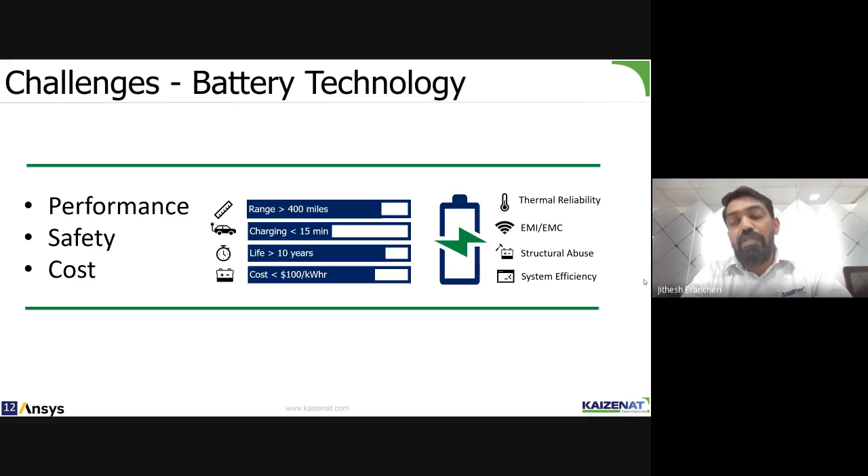At the end of the day, we need efficiency in the overall system, not just the battery. The whole system should work efficiently, while complying with all regulations, including structural abuse and thermal reliability.

How does ANSYS help in these scenarios? ANSYS provides a complete workflow for everyone working on EV vehicles. It basically gives a multi-scale, multi-domain, and multi-physics workflow right from the cell to the complete system.

At the cell level, the performance of the electrode and cells can be predicted. Then moving to the modules and thermal management, what could be the thermal impact, what temperature is generated, then EMI, EMC compliance, and structurally how the battery is going to be reliable, how structural reliability studies affect various load cases.

It could be an impact, penetration, or other load cases. And then the battery management system, another very important part to efficiently use the batteries. We can simulate and study those things, and then the system integration into it.

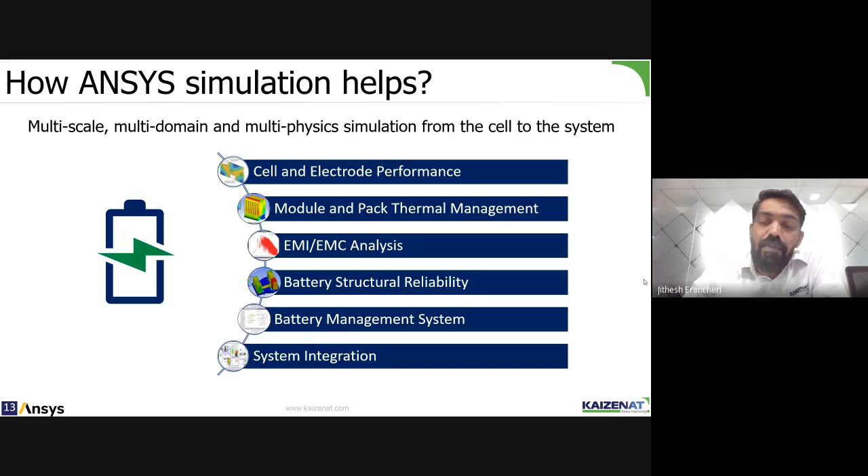That's another aspect of it, basically complying to the AUTOSAR rules and regulations. Let's go into detail, right from the cell and electrode performance.

Some of the engineering challenges we've seen are the thermal sensitivity of this electrochemistry, the complex structures of the electrodes, the porous electrodes, and the degradation of performance as it keeps aging. ANSYS offers a solution with a lithium battery template where users can directly key in those data and then simulate and study the sensitivity of various parameters.

It could be the materials, the particle density, or the electrode thickness and so on. You can also study different electrochemistries, and the impact of temperature and the C-rating of those cells, and the state of charge versus the VOC curve can be generated without any physical test. These are some of the outputs one can generate when looking at cell performance.

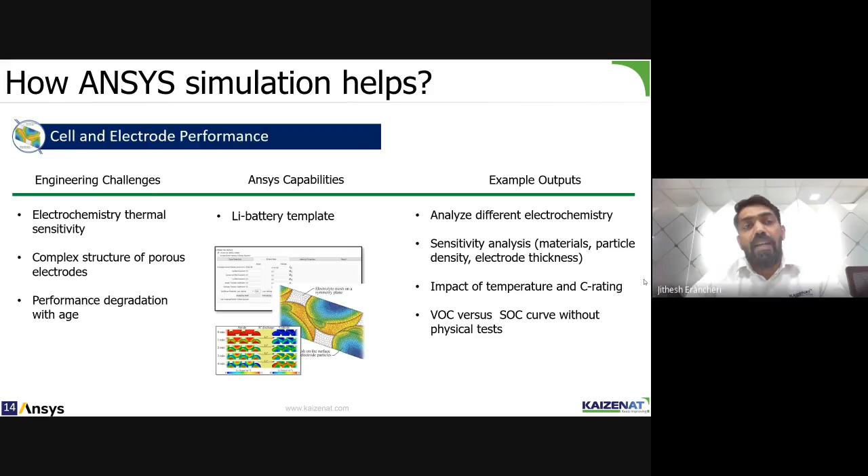Now let's say you wanted to study a battery module and pack for thermal management - what temperature would be generated and how it would be affected. That's where we can study using our conjugate heat transfer solutions, where we study the sensitivity of those temperatures, the cell current and voltage, and how much it varies from each and every cell.

We can also study battery cooling systems, like what could be the right approach to cool this particular battery - it could be liquid cooling or air cooling. And then we can always do different predictions, virtually testing on different drive cycles.

The fundamental thing is we can study thermal runaway and try to understand all the different kinds of abuse responses that need to be carried out, which is pretty important in terms of predicting failures.

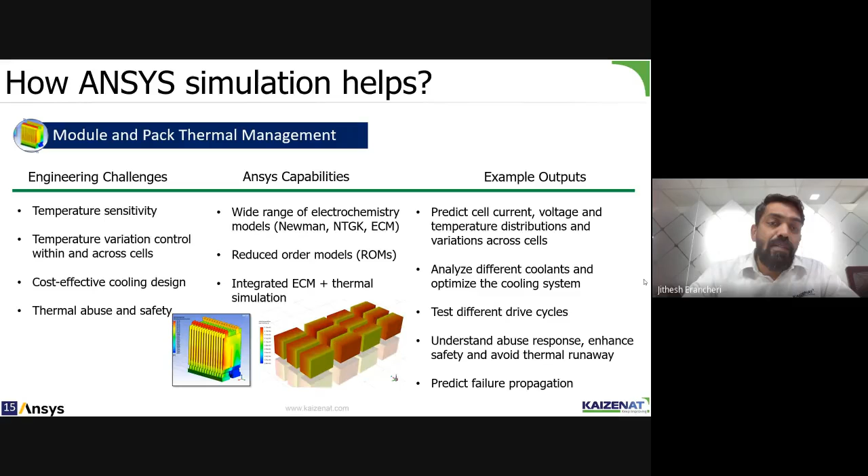ANSYS offers reduced order models, which can run at a fraction of normal simulations and produce thousands of designs in seconds. This is one of the new trends in the simulation industry, where we build reduced order models, generate new designs, do sensitivity analysis, and arrive at the design variables that can cause issues like failures, or the more sensitive variables that can affect performance.

EMI-EMC analysis is another standard process one has to do from an electromagnetic perspective, because electromagnetics always has interference as part and parcel of it. So we need to study the electromagnetic interference and the compliance for that, and we can detect that using ANSYS solutions for electromagnetics.

And then you can design or redesign your circuits, or redesign your BMS, with placements of filters or something like that.

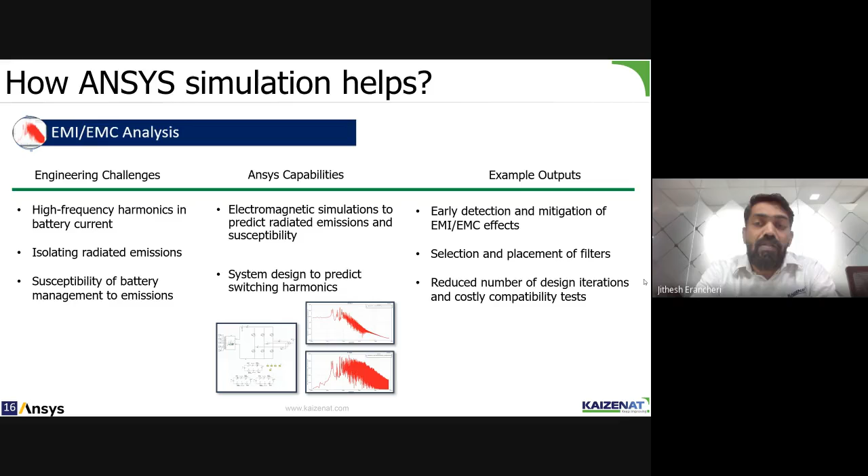These are some of the capabilities from the EMI-EMC perspective. Then comes battery structural reliability, where ANSYS mechanical solutions, which includes LS-DYNA, can now study various challenges and virtual testing on various scenarios - right from vibrations to impact, and penetrations of nails and so on, quite a lot. The beauty here is it's all coupled - all the physics are coupled.

So you have a structural analysis, but it's not purely structural analysis - you will also have a thermal analysis with electromagnetic solvers getting into that.

ANSYS Mechanical offers thermomechanical analysis for all those batteries, and you can also study the life in terms of random vibrations and fatigue, ensuring that all the abuses are not catastrophic - it should not create a lot of temperature, and you can study the state of charge when it is impacted with a bar, or some impactors, or nail penetrations and so on.

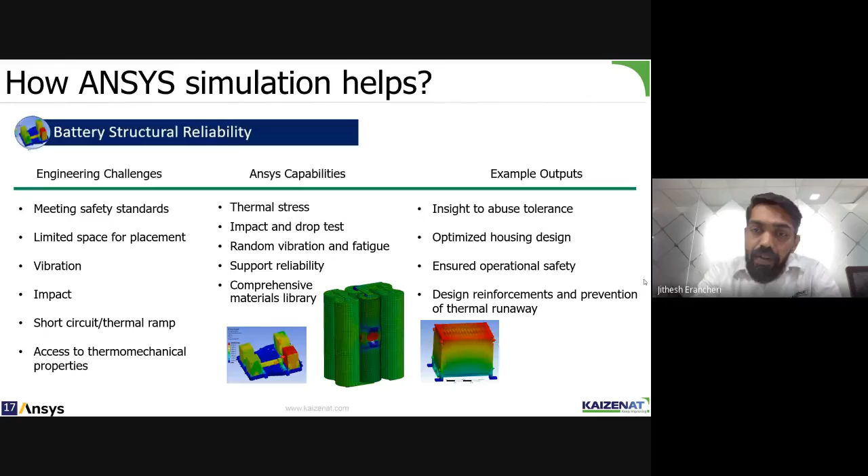Battery management system - this is one of the very important aspects of EV, where we need not only efficient usage of the cells, but also some sort of functional safety analysis. There are safety standards like ISO 26262, which is a compliance standard for BMS, and it has to be certified or comply with this standard in terms of functional safety.

ANSYS has solutions like Medini, which can do this kind of functional safety analysis, and generate certified code for that. So BMS is not only for optimizing efficient usage of your cells, but the solutions can also be used to predict whether your BMS is complying to the standards.

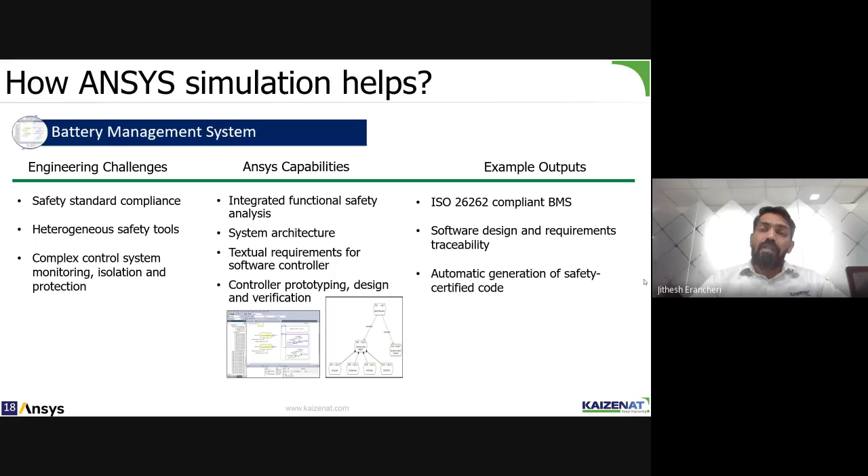System integrations is the final part of it. That means we can integrate everything together, working the entire system. I would say it can be called a digital twin, and the digital twin can be used to have a complete closed loop system where right from the cell to the system can be simulated, with the deformation in the structure. So this is a complete solution, a complete connection of all those things I was talking about all this while.

This basically connects right from the cell to a three-dimensional model, where you would have done some finite element model, to a control system and to the battery management system, and then back everything in a closed loop. This actually gives you, I would say, what can certainly be called a digital twin, and you ensure that your virtual prototype is satisfying its objectives and is pretty much well within the limits and regulations.

And you want to improve it, optimize it, you can do that, and then go for physical prototyping. So these kinds of simulations certainly help any designers who are into EV or electric vehicle companies, to upfront design a virtual prototype. It can be called a digital twin, and this can be validated anytime before you go into a physical prototype.

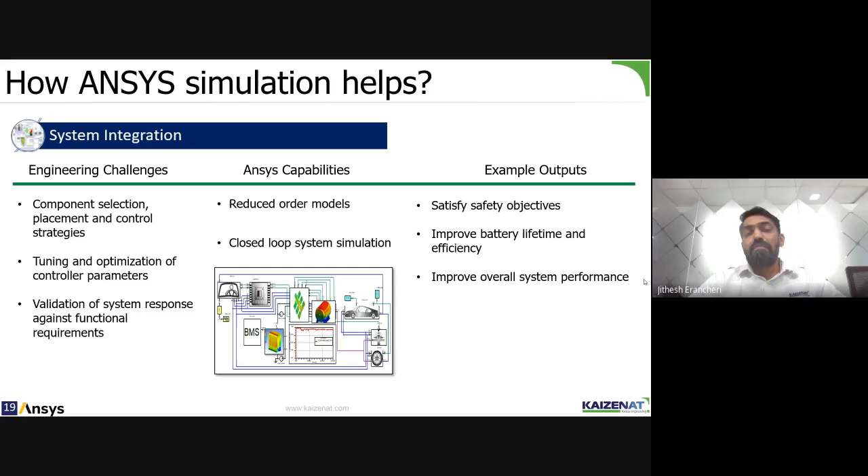And then comes the integration, the introduction to LSDYNA, and this is our second topic. In this, I'm just going to give a brief about LSDYNA software.

LSDYNA was earlier developed at Livermore Software Technology Corporation, Livermore, in the United States, and I think two years back, ANSYS acquired that company. It has been a front runner, I would say the global leader, in terms of crash analysis.

It started as a software code developed for impact, basically for bomb drop analysis, by a nuclear scientist called Dr. John Hallquist at the Livermore National Labs, United States. Somehow it picked up in the automotive industry, and then people in the aerospace industry use it for bird strike simulations, the locomotive industry uses it for rail coach crash simulations.

Appliance industries use it for drop analysis, and many other analyses for that matter. Since it was born in defense, it's been very widely used for blast, bullet penetrations, ballistic impacts, and internal ballistics, and so on. Construction equipment industries use it for rollover protection systems.

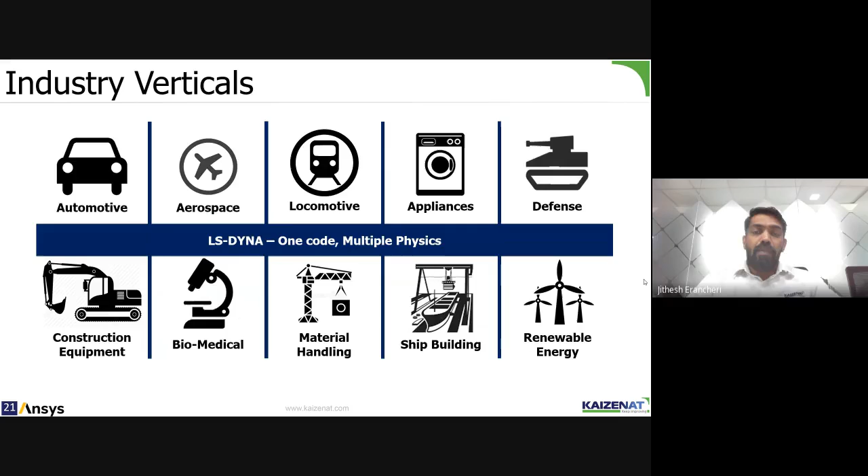It's called the LST product. After ANSYS acquisition, it is called LST. The LST products include LS-PrePost. It is a preprocessor where we import the CAD model and then do the mesh generation, apply the loads and boundary conditions, and then run it in the LSDYNA solver, and take the results.

And then post-process it. LST products also include LS-OPT and LS-TaSC. These are the two, I would say, optimizers which come along with LSDYNA. LS-OPT is used for various sorts of optimizations, in terms of thickness optimizations, material parameter optimizations. It can even be used with your FE models for various optimizers, in terms of whatever design variables you have.

Dummies, barriers, and tires - these are the three FE models which come along with the LST product, LSDYNA - basically calibrated dummy models which can be used for crash analysis.

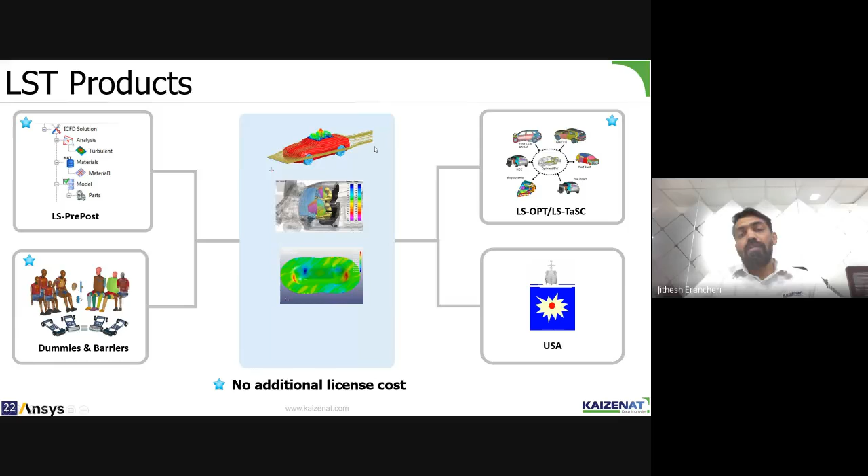As you can see on the screen, the center one is a CFD simulation, the second one is an airbag, and the third is a metal forming simulation. So everything is in one single code - though it is multiple physics, everything can be done in one single code. That's one of the reasons why LSDYNA is very popular, because it's explicit to implicit at any given point of time.

For the form part, you do a forming analysis in explicit, and then at the end of the simulation, if you wanted to do a spring back study, that can be done in implicit without manual intervention.

Heat transfer is another analysis where we have a thermal solver that works with our structural solver as well, so we can have a coupled heat transfer analysis or even a completely thermal analysis.

ALE and mesh-free methods are all trademark uses of LS-DYNA, used for fuel tank sloshing or even bird strike impact and so on.

Acoustics and frequency response are also capabilities of LS-DYNA, where we can see exterior noise, interior noise, and so on, quite a lot.

Discrete element models are ones where we can study the interaction between particles. For example, you wanted to study soil-structure interaction, or when a vehicle goes over sand or soil, how it's going to happen. This kind of study can be done with discrete elements.

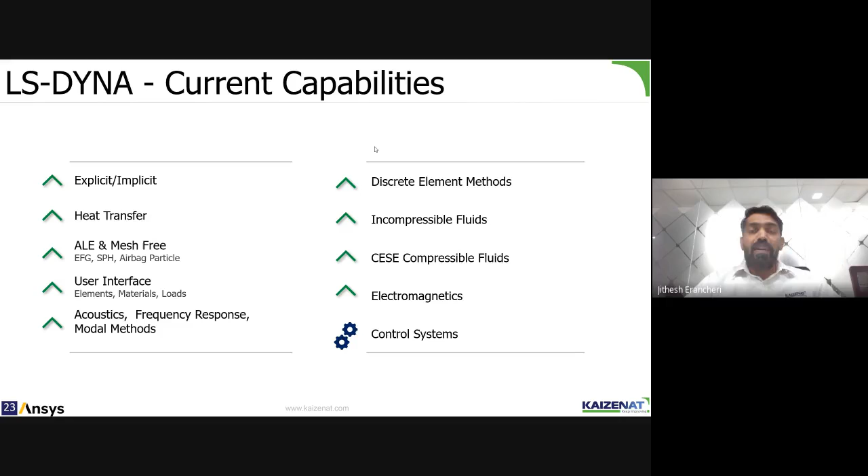Compressible flow solvers are available, and incompressible flow solvers are also available, along with electromagnetics, which I'm going to talk about in detail in the coming slides. So that's what it is - one single code with multiple physics.

Let's get on to the vehicle dynamics part. Vehicle dynamics is also very important in terms of the vehicle development program. As you know, LS-DYNA comes from the ANSYS family.

I thought I should take some time to introduce you to a product called ANSYS Motion, which is very effective and can be used extensively for all kinds of rigid body analysis. As you can see on the screen, various kinematic simulations can be calculated and modeled.

All you need to do is import the geometry, and then simulation models are built from these, and then it will be solved, and you can extract the joint forces and so on.

As you can see here, we have complex gears with a lot of contacts, and everything can be handled. You can see there are a lot of chain sprocket systems, then cylinders and pistons, then of course the cars.

You can see the cornering of the cars, and then you can see the stabilities - you can predict those things in ANSYS Motion.

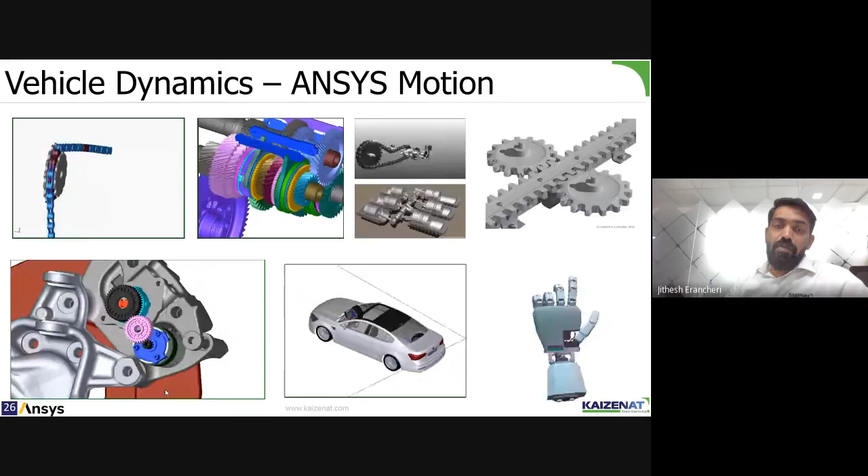The suspension systems can certainly be modeled. You can bring in CAD models and introduce the suspension system. This is a two-post simulator, and you can see the struts, arms, and everything simulated, and you can extract the joint forces and predict it.

There are a lot of kinds of joints available here - constant velocity joints, fixed, plunging, and many other joints available. You can actually use those joint libraries, model these things, and then simulate in ANSYS Motion.

As you can see here, we can also do some joint simulations in terms of bearings, and you can study the deformation or the flex bodies in terms of kinematic simulations.

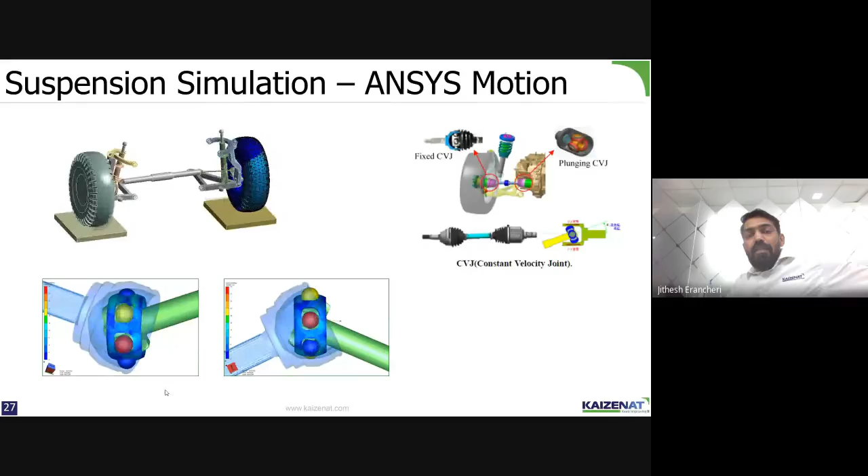Life predictions - life prediction is another important aspect in ANSYS Motion, in the sense that you can not only simulate the flex bodies and predict the stresses, but you can actually use them to predict the life of it.

You can see here there are different angles of rotation, and you can study these things and see what the max value of stresses is, built at which particular angle you are getting these stresses, and you can study the failures.

You can see the failures exactly at the particular locations where they occur. So it can reproduce real life problems in terms of fatigue analysis, which is pretty useful from an overall product design perspective.

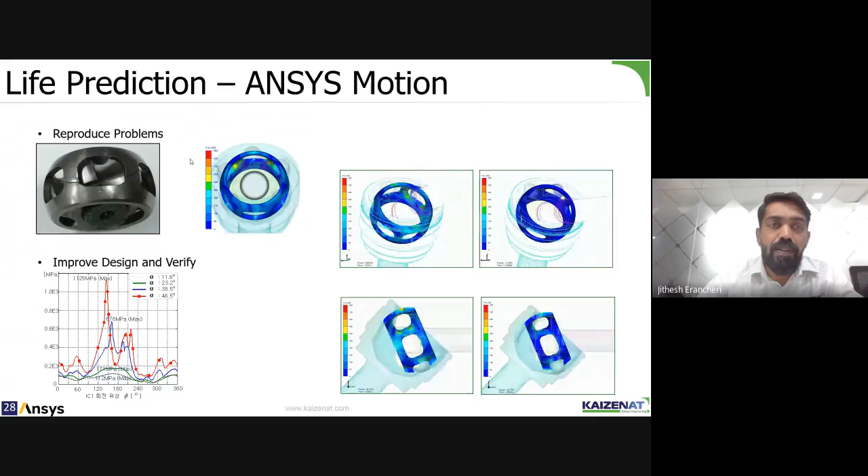ANSYS Motion helps users build these assemblies very quickly. We have a shaft designer's template where you can directly define the shaft. We also have a housing designer template, where you can design the housings, and then there are gear designers to design the gears and define all those parameters. And then there's certainly a bearing designer, which can be used to model the bearings as well.

So there are a lot of toolkits which come along with ANSYS Motion, or rather which can be added to ANSYS Motion, and with that you can have a comprehensive simulation of your entire system.

These simulations can also talk to 1D simulations, or what we call model-based system engineering, MBSE models. For example, Modelica libraries or even ANSYS Twin Builder. You can connect with them and build your hydraulic systems. For example, you have some hydraulics that needs to be optimized based on your kinematics. You can connect the hydraulics which you build in your ANSYS Twin Builder, or Modelica libraries, or whatever it is.

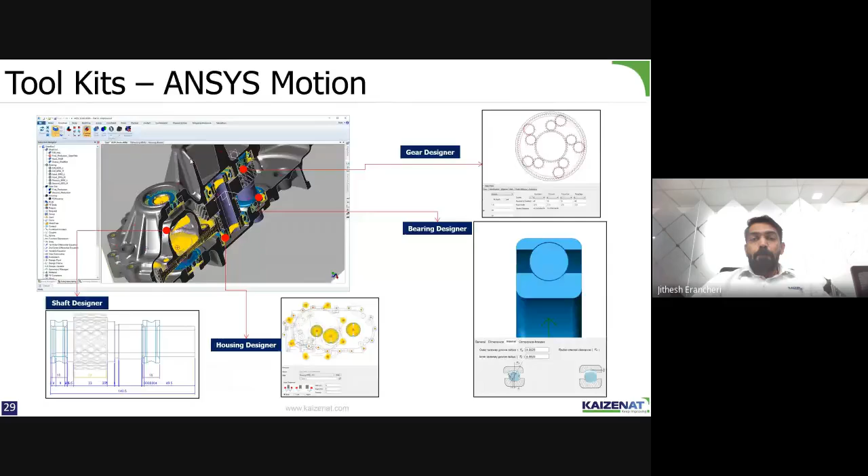Now coming to the aspects of kinematics. The kinematics is pretty much important, I would say, because the models are certainly going to be accurate only when you capture your road excitations properly. That means, for example, you can do a kinematic simulation of a car, a lane changing simulation, or a cornering simulation in a kinematic solver.

But the excitations from the road, when you do a proving ground testing -- all these kinds of testing are called proving ground testing -- the excitations to the car are coming from the road, and they're basically transferred directly through the tires. So if you do not have a proper tire model, your excitations to the car body are going to be completely different, and it's going to generate different load excitations into the car.

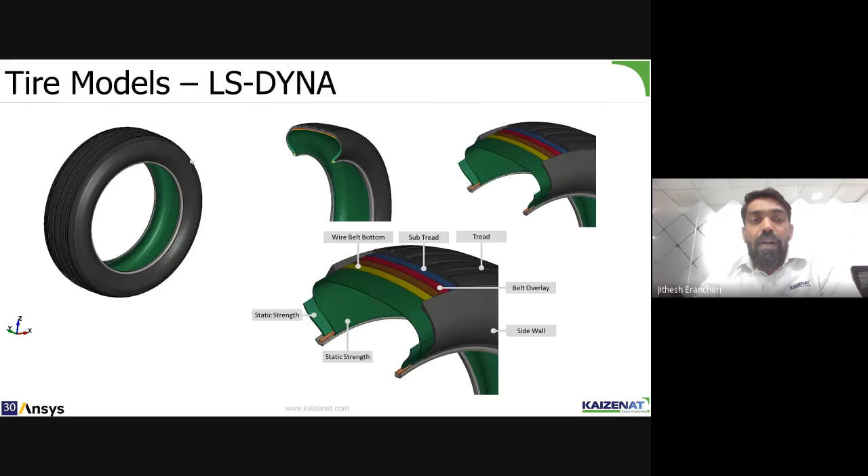If you introduce this model into your vehicle, it's going to have good excitation capturing, and that's certainly going to have a good effect on your overall durability and so on. So I just want to show you a few examples of what we can do.

With LSDYNA tire models, we can digitize the roads -- this is called proving ground testing, where you can actually have good contact between the tires, and the tires are deformable. Earlier, in the kinematic simulations we saw, the tires were rigid. So the excitation is going to be different when you introduce tires as deformable, and LSDYNA offers a lot of materials to model very accurate tires.

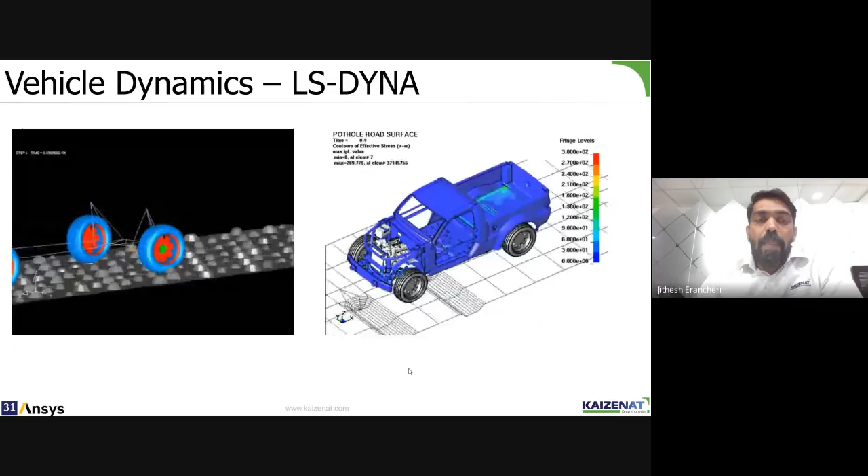Another example over here is with the chassis. You can study such kind of modeling and motions with different digitized road surfaces, where you can do the simulation with actual deformable tires, and the excitations onto the structures are going to be precisely the same as actual.

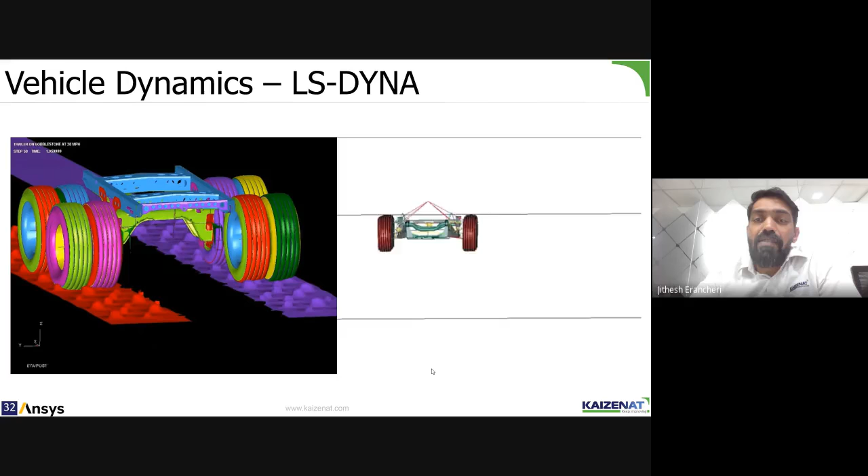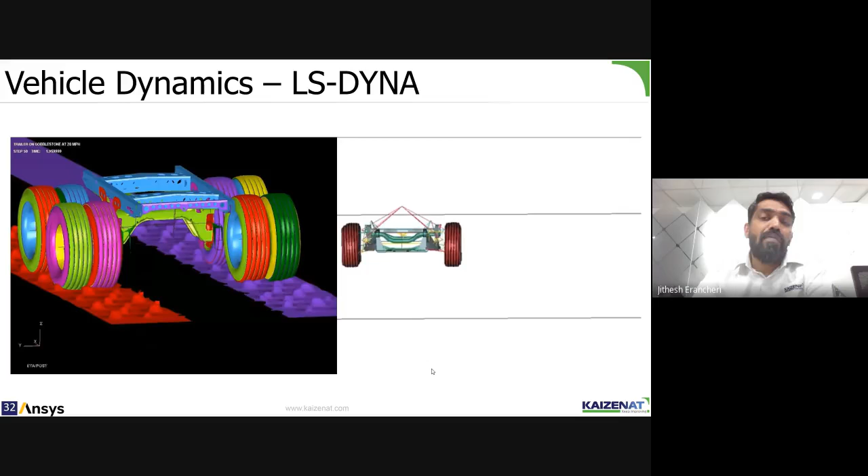This is another lane changing simulation by Kia Motors, using LSDYNA software to study it. The beauty here is that only one model needs to be built. You don't need multiple models for all this kind of analysis. Just one model. The same model can be used for battery crash, vehicle crash, vehicle lane changing, NVH, and so on.

Coming to the battery crash, LSDYNA's EM solver has been developed, I would say probably in 2006 or so, introduced into LSDYNA. This particular solver can do quite a lot of stuff. It's been developed over a period of time. Initially it started as a partnership with Ohio State University for electromagnetic forming. Then there was a requirement from various other manufacturing processes like resistive heating, spot welding, and induction heating. So all these were the initial requirements from customers.

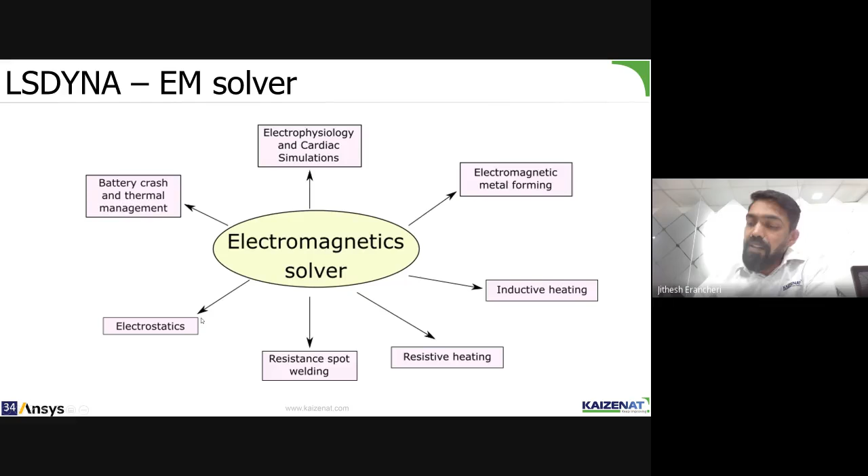Then battery crash and thermal management came into the picture. Now it's also widely used in the medical industry for electrophysiology and cardiac simulations. It can also be used for electrostatics, and this is the kind of EM solver capability.

Now, how does true multiphysics work in LSDYNA? The multiphysics works is pretty easy. The electromagnetic solvers can talk to the thermal solvers, and the thermal solvers can also talk to the solid mechanics solver. We also have the ICFD, which has a direct connection with the electromagnetic solver.

So the entire electromagnetic solver capability has been coupled very seamlessly with these other solvers of LSDYNA. The thermal solver can transfer the temperature, the electromagnetic solver can compute the Joule heating and give it back to the thermal solver. This Joule heating temperature data will be passed on to the solid mechanics solver, which will calculate the deformations based on the temperature given, and then give it back to the thermal solver. It interchanges the data. Similarly, the electromagnetic solver calculates the Lorentz forces, which are given to the solid mechanical solver, and the solid mechanical solver gives the displacement back to the electromagnetic solver. It's just an exchange of information between them.

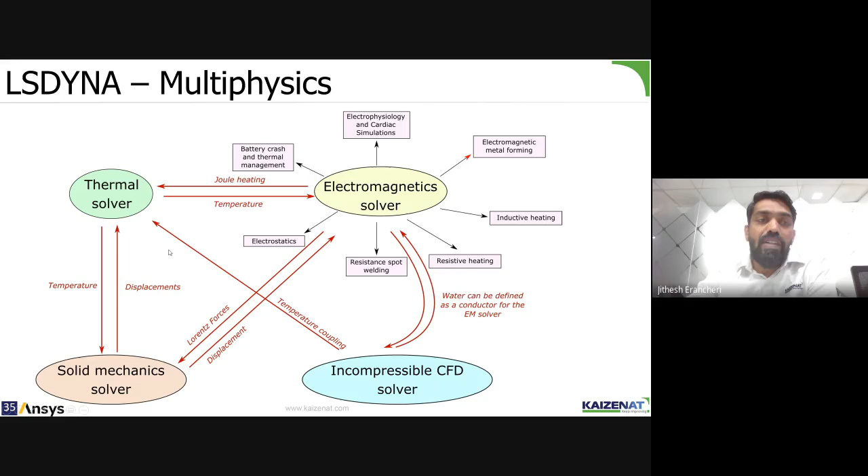The ICFD solver, which is a CFD solver from LSDYNA, can also be coupled with the thermal solver, and you can have a connection between them. They interchange the temperature data using a conjugate heat transfer methodology. That's how it works in the battery model. The mechanical solver passes displacement information to the electrical solver, the electrical solver passes temperature and Joule heating information to the thermal solver, and that is taken as input by the thermal solver and given back as temperature data. So they just talk to each other and simulate the battery problems.

In LSDYNA, we can simulate batteries using four different models. The very fundamental, old model, from when it was first introduced, was to model it using solid elements, meaning cells modeled with solid hexahedron mesh in a layered meshing approach. It was already there in LS-PrePost, so we use LS-PrePost to model the layered mesh. The same mesh is used for the electromagnetic solver, thermal solver, and mechanical solver.

So the thing is about the element formulations, and then some of the settings need to be done. But of course the computation time is going to be really huge, because you need to model a lot of cells if you have a big battery pack setup.

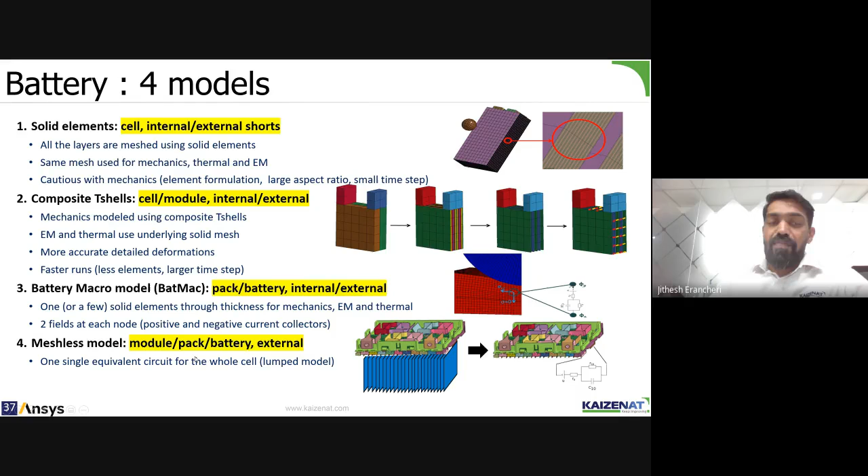The last one, the 4th model, recently introduced, is called the meshless model. That means we basically use one single circuit for the whole cell. It's kind of a meshless model which is very quick. It's a lumped model which can actually generate the equivalent Randles circuit for that entire cell.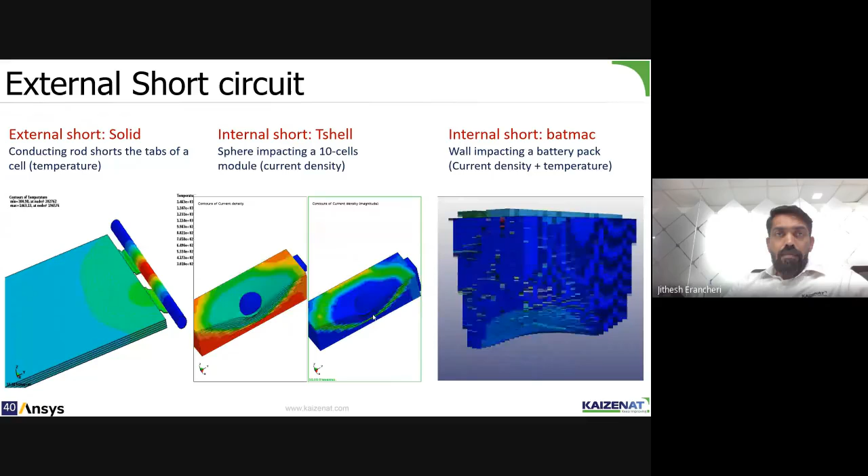Another test one has to do for the simulation, or rather for validation or regulation purposes, is about nail penetration. That means you need to study the nail penetration and see what kind of short circuits and temperature results occur. What is going to be the temperature profile when the nail is impacting a battery pack.

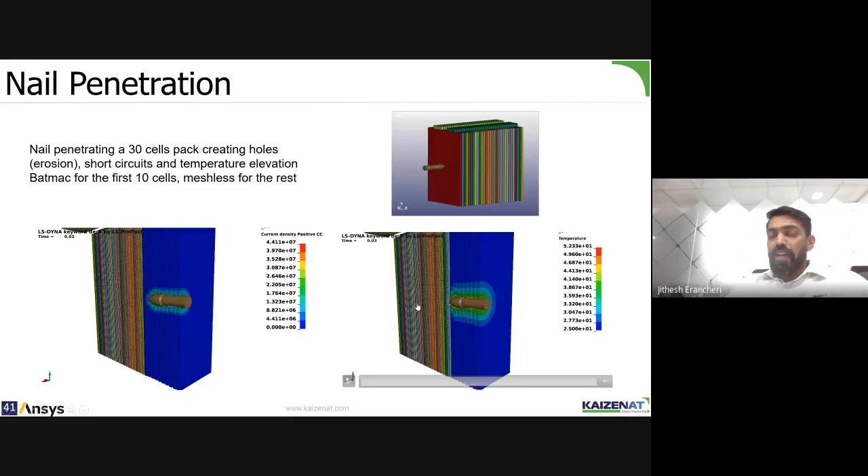Then the important thing is about thermal management. The thermal management of those batteries is equally important, same as the case with battery crash, or battery nail penetrations and so on. So there is a pack of 96 cylindrically cooled cells, and we wanted to study using direct air cooling or liquid cooling.

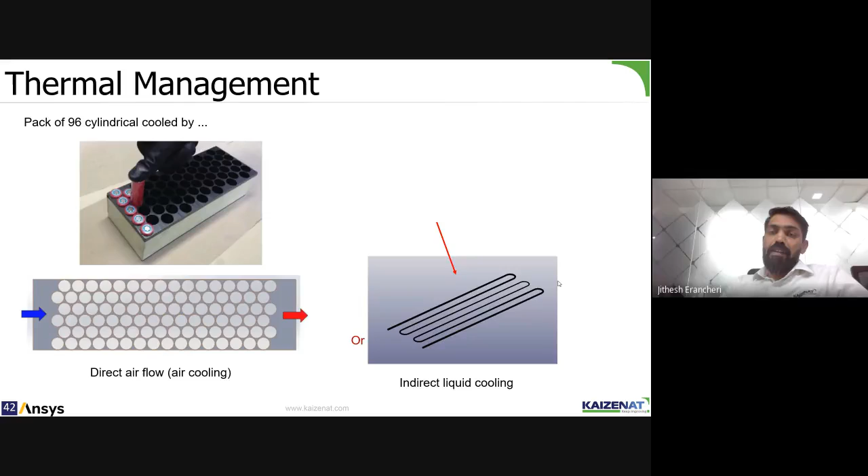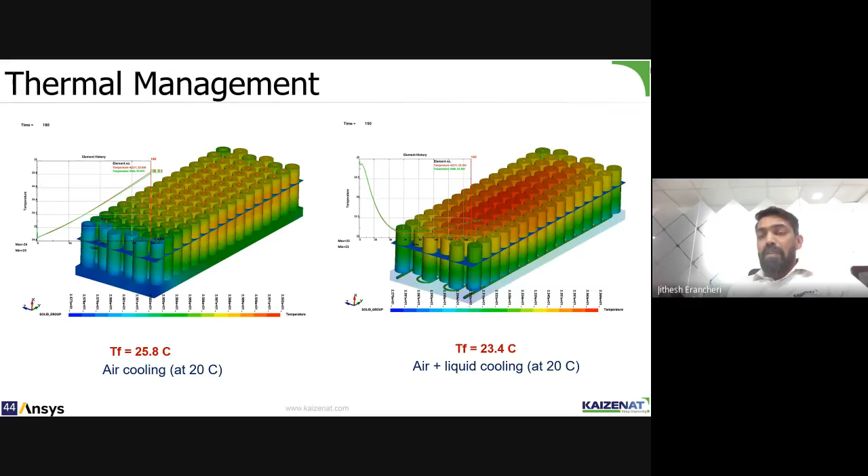And with air and liquid cooling together, you can get 23.4 degrees Celsius. So what I'm trying to show here is the batteries are modeled using our EM solver, the electromagnetic solver from LSDYNA. The flow or cooling simulations have been done from the ICFD solver of LSDYNA.

And even with the same mesh, you can do a battery crash. So only one model needs to be built and one model needs to be solved. There is no need to have multiple solvers or multiple softwares added. Everything can be done in one single software. That's the beauty of LSDYNA, and that's why people say it's a single, one code, multiple physics solution.

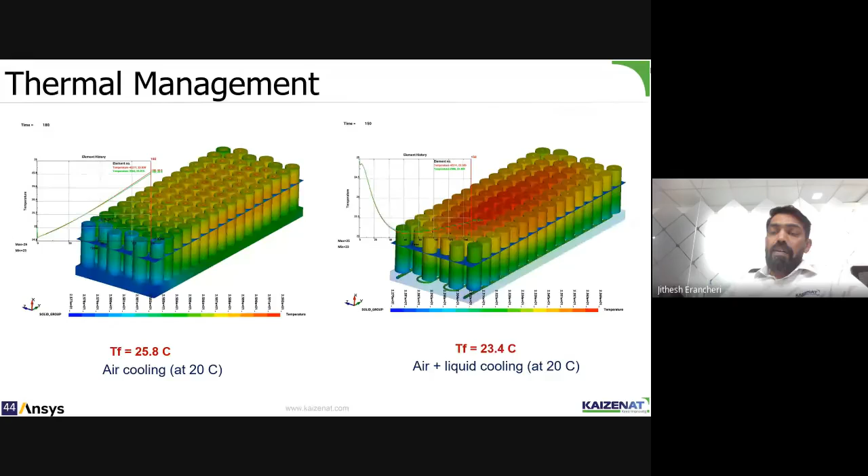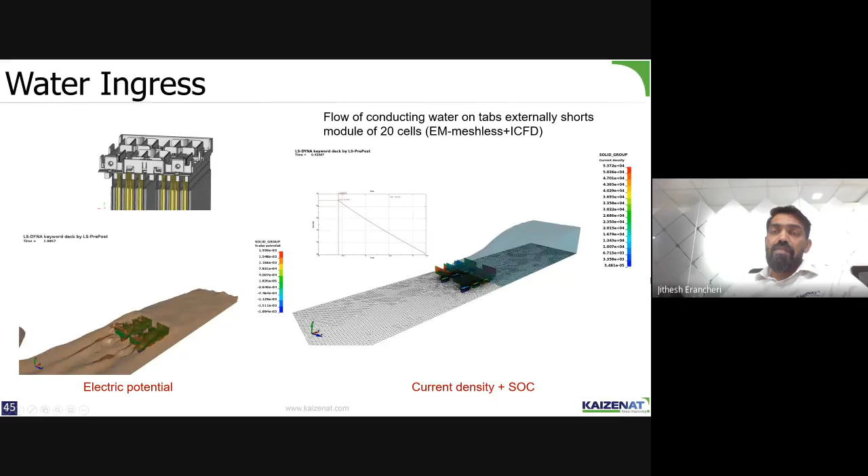So you can see this is the state of charge curve, it's just gone down, right? Just gone down. So the point I want to make here is that you can simulate multiple things, not only the cooling simulation, you can also do the water ingress simulation in the battery module during your vehicle development process using LSDYNA.

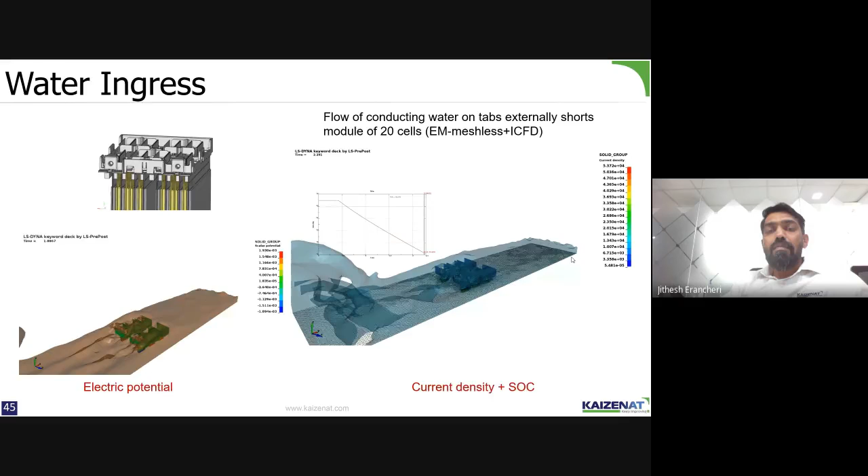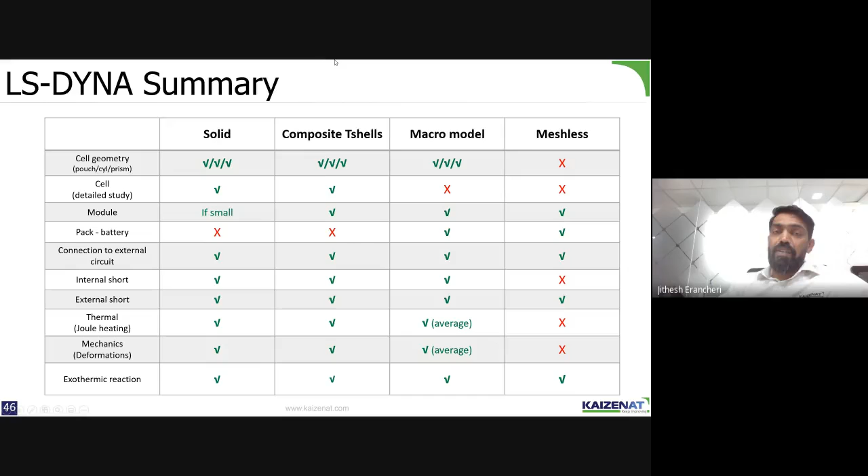So the conclusion here is ANSYS offers all the EV electrification process, I would say the R&D process, a performance which basically close to around 1,000 times.

That means with the reduced order models, you just need to have only a few designs to be done, and the balance everything is generated from trained data, which is from a machine learning process.

So ANSYS has these reduced order models, which basically enhance the product development cycle, because you get 1,000 designs in 1,000 seconds. So once you have the data ready for, let's say, a few of those iterations, then everything is just a matter of a few seconds. Just imagine when one iteration takes 5 or 6 hours, versus generating this data in seconds.

That's the beauty of reduced order models, and ANSYS has that capability to introduce it, so you can do a lot of sensitivity studies and then arrive at the right parameters that basically contribute to the better performance of your EV system.

Design cycle can be reduced to 50%. So because of all these kind of new techniques coming into the simulation industry, especially with ANSYS, we can reduce this design cycle to close to around 50%, and the productivity gains, or rather the cost reductions, can be close to around 30%.

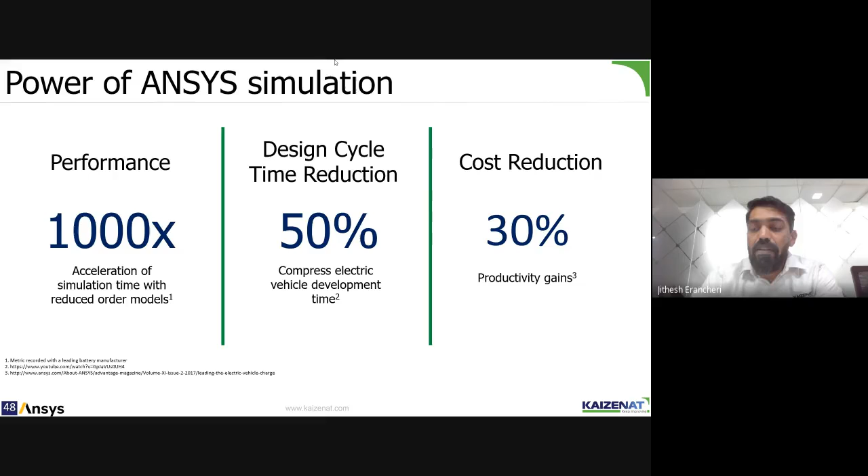So it has a comprehensive solution for EV vehicles, right from cell to the system. And this is the last slide of my presentation - these are the products, the ANSYS solutions, and the applications where ANSYS solutions can be used.

So if you are using a cell or electrode performance, then of course you may have to go with Fluent, or ANSYS LS-DYNA, mechanical, and twin builder.

If you wanted to have a module or pack thermal management, it's always better to have Fluent and twin builder. EMI, EMC can be done with ANSYS twin builder, and then battery structure reliability can be done with ANSYS mechanical and LS-DYNA software.

Then we have the battery management system, where we need ANSYS Medini. It's pretty important because this has safety codes which can be generated from there, and that is very mandatory as per the regulations. So Medini with Fluent, and ANSYS SCADE with twin builder, could be the right option for BMS.

And system integration, that is a digital twin - it's pretty important when you have all these things done, where you can make a virtual prototype or functional prototype, and that can be done using ANSYS Fluent or twin builder and so on.

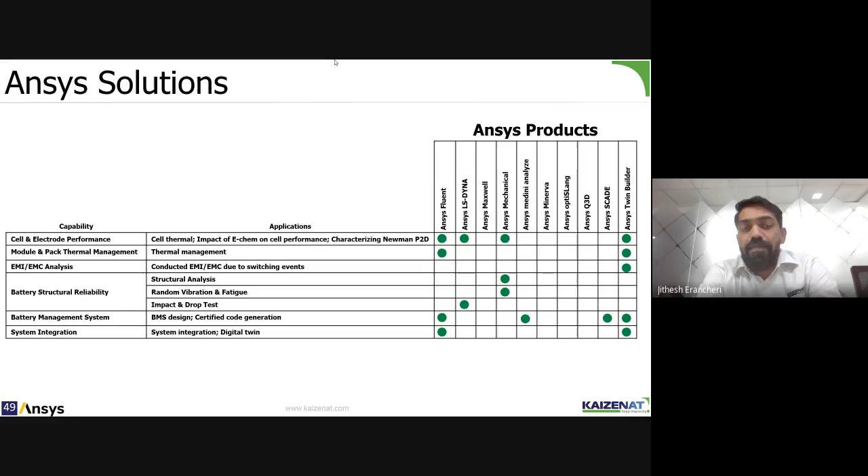So that's it from my side. If you have any questions, you can ask me. I can try to answer you as much as possible.

Yes sir, thank you very much. You're welcome, thank you for the nice presentation. Now I welcome all participants, if any query please ask the sir, related to any simulations, modeling. Okay, thank you very much sir for the nice session. Thank you, thanks everyone for listening to me, and thank VJTI for giving us an opportunity for presenting ANSYS solutions. Yes, thank you sir. Thank you, yeah you can go sir. Thank you very much.